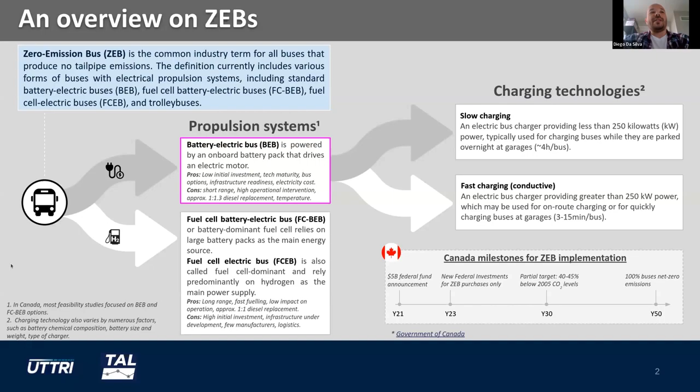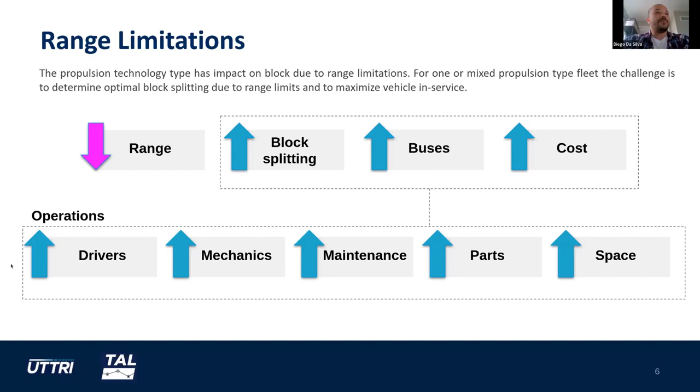Okay, another problem related to the operation is the transition phase, where diesel and electric buses, or ZEB buses, will coexist, making the problem of optimizing the mixed fleet an even more difficult problem given the number of variables and parameters that must be included. The transition problem mainly affects large agencies, and less accurate decisions in this phase will imply additional costs due to inefficient fleet use. So the path to zero emissions is not a straight line, as you can see, and we require careful planning at all levels.

Okay, and speaking of planning, the traditional framework that previously followed a linear flow with decisions that started at the strategic layer should be reviewed as well. We can assume that the strategic level is more or less already at a more advanced stage, as many agencies, at least the medium and small size, have already decided on battery charging infrastructure. However, even those who have already selected the operational model will have to adapt to the new decision-making flow.

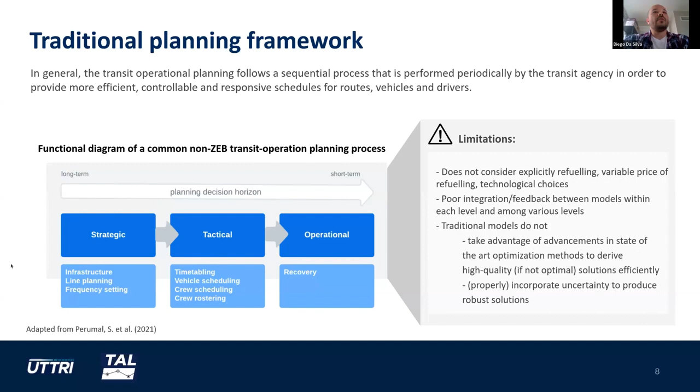So this is how we see the planning framework update. In this new context, the interdependence among decision layers will increase with emphasis on the tactical and operational levels, which, in addition to reviewing the flow of decisions, means we'll have to check the methods and processes whereby some traditional problems are currently solved.

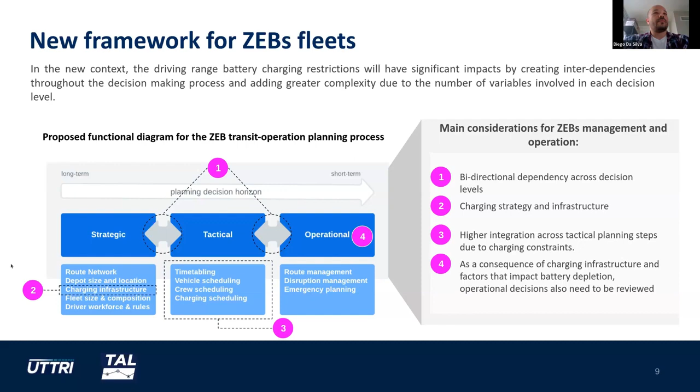According to the OPTA report published last year, the technology must be suitable for the network rather than the opposite. So in this strategic layer, decisions on which technology to use should be linked to emerging transit modalities and urban mobility philosophies. As previously mentioned, the transition phase, where the vehicle fleet will be hybrid, is one of the main points of attention in planning ZEBs. So the operational department should be equipped with tools for daily decisions about the mixed fleet.

In the tactical layer, the impact will be mainly on timetabling processes, vehicle scheduling, driver scheduling, maintenance staff scheduling. So all the scheduling stuff. In this layer, decisions are largely supported by IT tools. However, software development companies are still researching and collaborating with academia to update their products. Current solutions still need to be prepared to deal with each transit agency's decisions, new variables and new parameters, since the operating model is not standardized and will strongly depend on local features and local conditions.

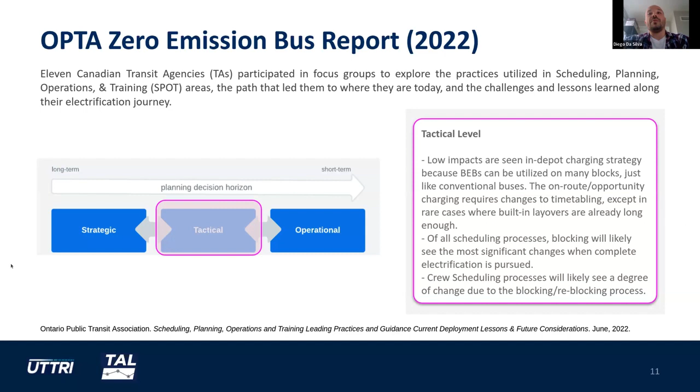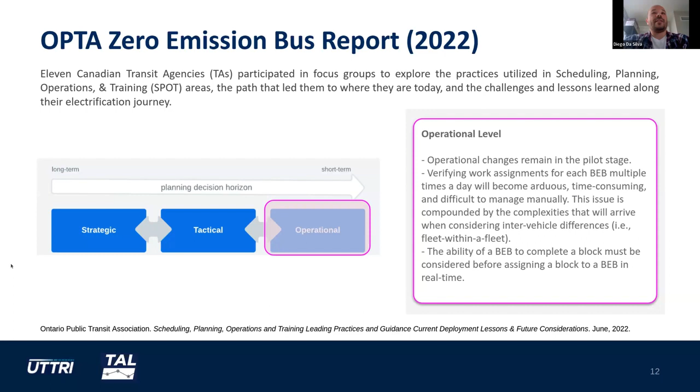The operational layer, where day-to-day decisions are taken, will be greatly affected by problems during the transition as well. As highlighted on this slide, verifying work assignments for each BEB multiple times daily will become arduous, time-consuming, and difficult to manage manually. Thus, decisions should be data-driven and rely heavily on automated tools. So indeed, the transition to ZEBs will require a strong IT strategy for developing new tools and being ready to deal with the massive use of data.

At all levels, especially in the tactical and operational layers, data-driven decisions will be crucial in optimizing the service. Here, we are not limiting the options to more sophisticated mathematical modeling, but also visualization tools, dashboards, performance indicators, and decision automation through learning methods. Despite not being the focus of this presentation, transit agencies are living a crucial moment to review their technology architectures and adjust their systems to an increasingly integrated and data-oriented business model.

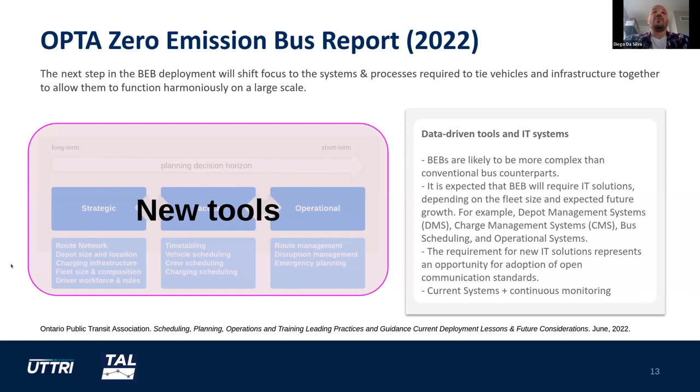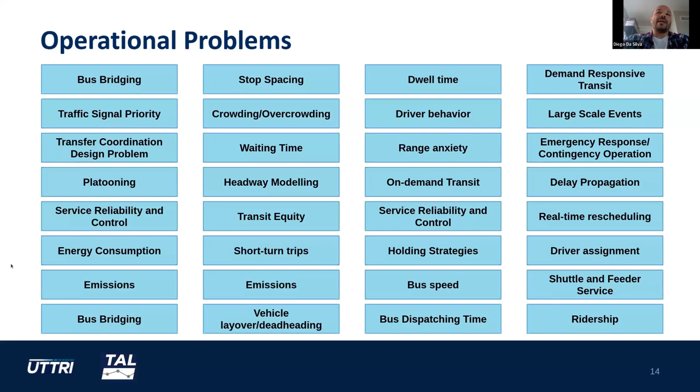We want to emphasize problems at the operational level to share our recommendations with transit agencies. Even the feasibility tests are relevant data so that we can anticipate the modeling of some operational problems. If we can access this data, it is quite helpful to update all this range of problems that we are showing on the slide. We list the main applied problems, some of which are known from day-to-day operations and will be impacted to a certain degree by strategic and tactical decisions. In this section, we will have a presentation of energy consumption analysis that can give us ways of thinking about solving problems using computational methods on energy consumption. Yeah.

Okay, so the future, or rather the present, of the challenge in implementing ZEBs lies in identifying the most relevant tactical and operational problems, using data in its most diverse representation, and adopting new optimization methods combined with learning methods. And collaboration is at the heart of all this, because just like the challenges in climate change, those problems can be solved in partnership. So I'm sure our team is eager to collaborate more closely with companies and transit agencies.

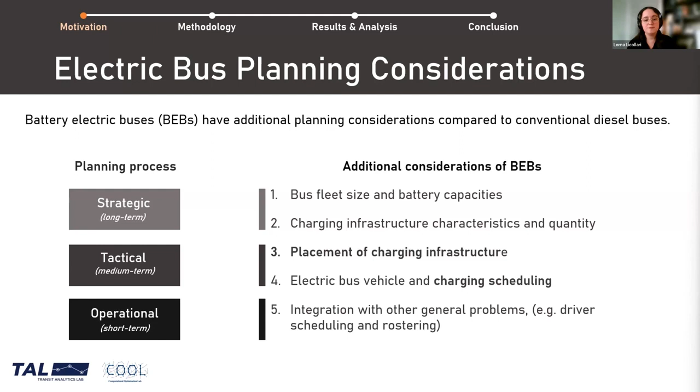So just a little bit of background within the context of battery electric buses. There tend to be 4 primary modes of charging. There's in-depot charging, which is essentially what it sounds like, where chargers are installed in the depots or in garages, typically charged overnight, and these chargers tend to be slow chargers, around 150 kilowatts.

And then we also have wireless and on-route charging, which to a certain extent are both chargers that operate along a bus's travel. Wireless chargers are typically installed along a road, and on-route chargers are non-wireless chargers that are installed at stops or at terminals. Both of these tend to be faster chargers, with wireless chargers typically ranging from 100 to 300 kilowatts, and on-route chargers can be up to 600 kilowatts.

Another novel approach is battery swapping, where battery electric buses with removable batteries are used. These batteries are fully charged and then swapped during daily operation.

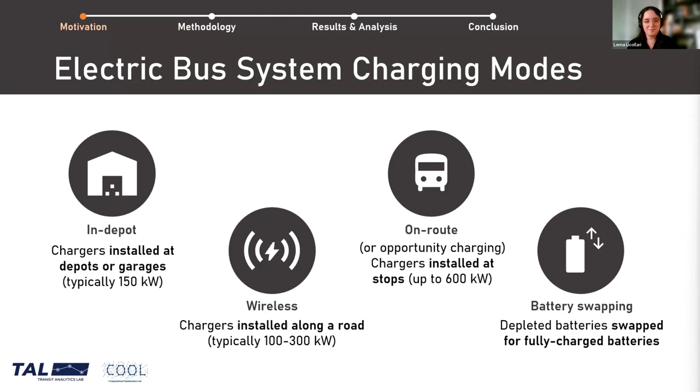So within the problem of optimizing battery electric bus charging infrastructure, there are a number of approaches, each taking a slightly different perspective with some combination of characteristics that relate to the context of the problem. Generally you'll see either an electric or a mixed bus fleet composition, where the problem focuses on a full replacement of a bus fleet versus an existing mixed fleet and the transition period.

There's also the different charger types and charging modes that we discussed previously: the charging speed, the mode, the capacity of the chargers, and the cost. There's also the decision scope, which reflects what the problem is trying to select, which parameters involved in the system are assumed or given, and which parameters are being optimized.

We also have the operational characteristics, which tends to be the charger location. Are we putting chargers in the depots only? Are we putting chargers along terminals? Or are we also considering the possibility of intermediate stops with chargers installed?

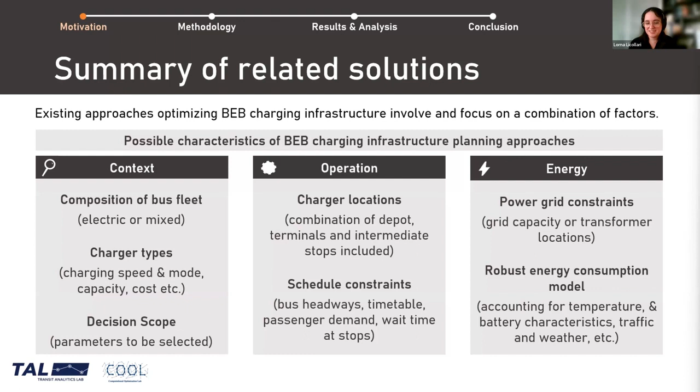And within the context of this problem, there are a few areas that we are focused on developing, particularly in the context realm, the decision scope. So we are interested in the scheduling of vehicles with explicit consideration for the charging schedules, where we kind of try to tackle both problems at the same time.

We're also interested in placing chargers not only at depots and terminals, but also at intermediate stops. And in terms of schedule constraints, when you rely on, say, a timetable or bus headways, many solutions tend to make assumptions about the underlying block schedules and vehicle schedules, which are important when planning out the charging of these vehicles.

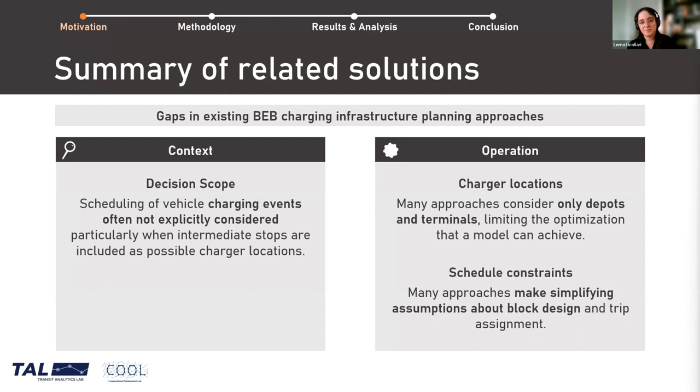So in terms of the research objectives, it's kind of two primary areas. We have the design of a generic solution for optimizing the on-route charging infrastructure. And we have a numerical analysis with a simplified model structure and applying that to data from a Canadian transit system. The generic model is designed to kind of support potential more robust representations of a number of characteristics, including charger characteristics, energy consumption models, and more complex electricity cost and infrastructure systems.

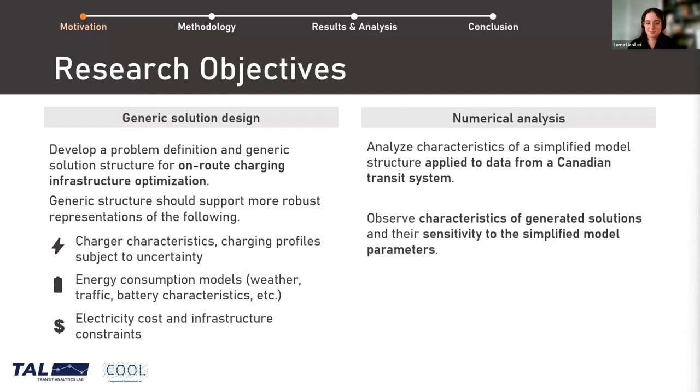In terms of framing the problem, as I mentioned previously, the focus is to maintain an existing block schedule with a fleet of battery electric buses by placing the chargers and scheduling the vehicle charging. This fleet will be entirely electric. All bus stops, including terminals, are options as potential charger locations, and we assume that there will be chargers at depots so that at the start of daily operation, all vehicles can be fully charged.

The transit network in our problem will consist of multiple bus routes that are being served by the bus fleet. And the constraint for vehicle charging is that we must maintain vehicle block schedules, so we're not adding any additional wait time.

You might notice that in this framing, we are considering a single block schedule, when the reality is our charging infrastructure will support a system through multiple different sign up periods with a block schedule associated. So one of the next steps that we'll discuss later in the presentation would be to kind of consolidate the different solutions for different candidate block schedules. And this could be solved as a set covering problem.

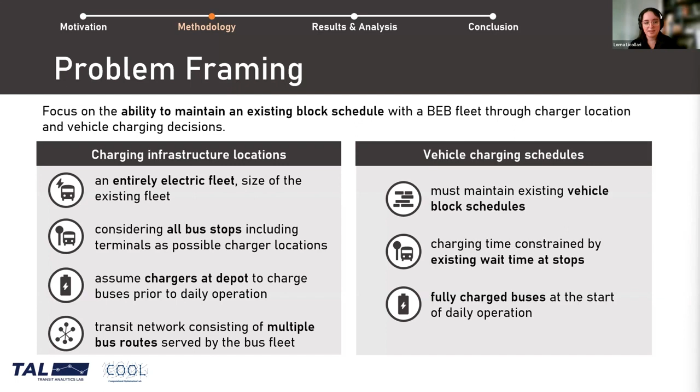So in terms of the problem structure, we have a network of potential charger locations, which in essence is stops and terminals. Each route in our system spans a set of possible charger locations. We set up our block schedules as a set of blocks where each block represents a vehicle's activity over the study period, which is one transit operation day. And each block consists of a set of trips where in each trip, the vehicle operates along a route.

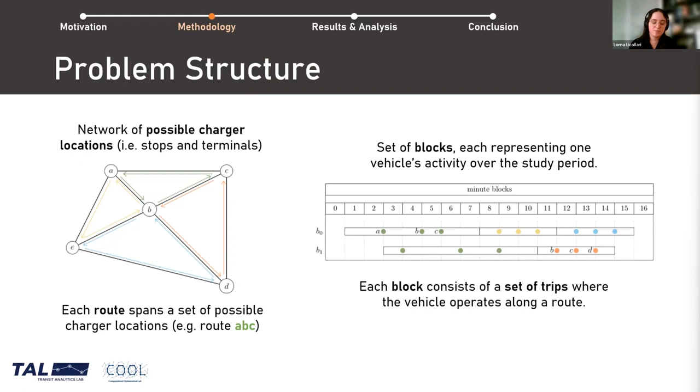In terms of constraints, we have three different categories of constraint sets. We have constraints surrounding the state of charge of a vehicle, which constrains the charging and discharging of a particular vehicle. We have constraints to maintain the physical capacity of a charger, i.e. we have one charger at a bus stop, we can't have two buses charging at the same time. And we also want to constrain when a vehicle can and cannot charge, which is essentially the vehicle can only be charging when it's idling at a stop that has a charger.

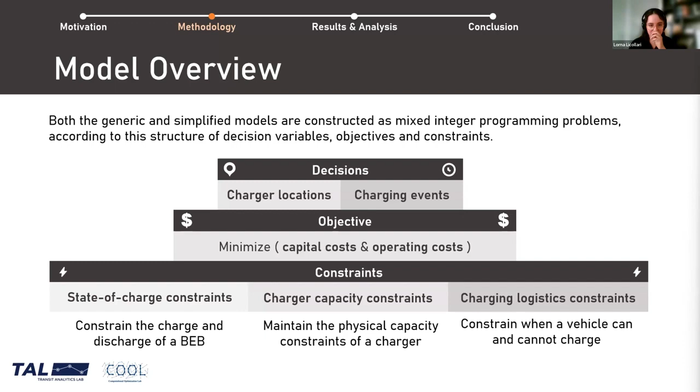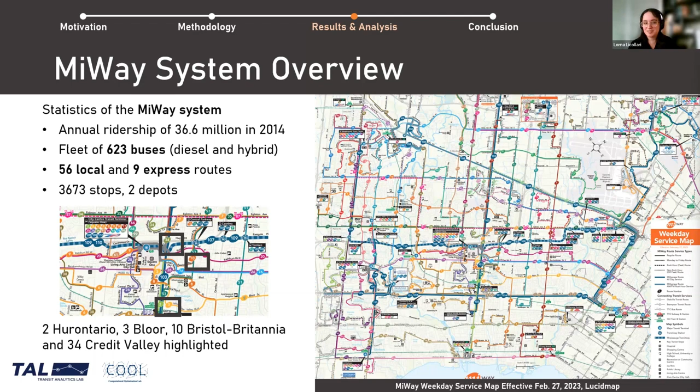In terms of the numerical analysis that we did during this project, we relied on data from the MiWay system. So I just have a quick overview of the MiWay transit system here. You can see the annual ridership of 36.6 million. There's a fleet of 623 buses, which currently are a mixed fleet of diesel and hybrid. We have 56 local and 9 express routes. You have over 3,000 stops, and there are 2 depots. I also, in the image here, have 4 routes highlighted. The reason for this is because these are the routes we focused on in our base numerical solution.

Here you can see on the side, we have a depiction of the final solution with the chargers placed. You can see the 4 routes in the different colors with labels, and we have 7 chargers placed along these 4 routes. You can see that we have some overlap. So even though each route ranges from 4 to 2 chargers, because of the overlaps, we only have 7 chargers in total.

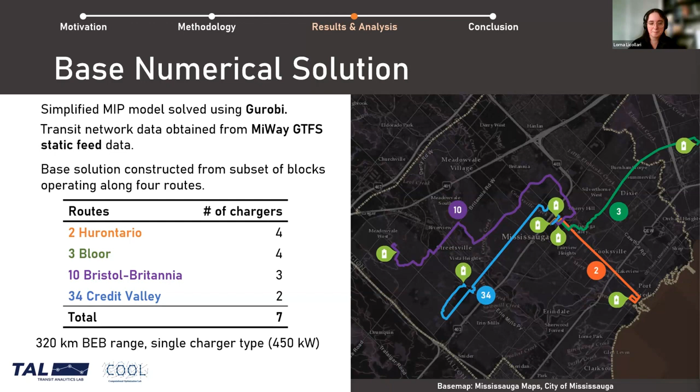The model was solved using Gurobi. And as I mentioned before, MiWay data was used, specifically GTFS data from the static feed. And then the second half of the integrated problem involves the charging schedules. Obviously, the charging schedules operate on a per block basis, so it would be difficult to show it all on one table here. But on the side, you can see the image.

We have a partial sample schedule for a bus which operates on the 3 Bloor route. You can see that it starts its journey at the City Centre terminal. It completes one trip to the Kipling terminal and then charges for 3 minutes, after which it goes all the way back to City Centre terminal and back to Kipling again to charge for 3 minutes. And then on its next set of trips, it decides to charge at this intermediate stop here for 1 minute before proceeding on its journey.

And then another useful set of data to look at here is the total time charged at each of the chargers. You can see the 7 chargers listed here, and it's pretty clear that the terminals are where the buses tend to charge for the longest, which makes sense because that is also where they're idling for the longest. And you can see that for some chargers, like this Winston Churchill Boulevard charger, we don't need it very much, but we need it as kind of a pickup during the operation.

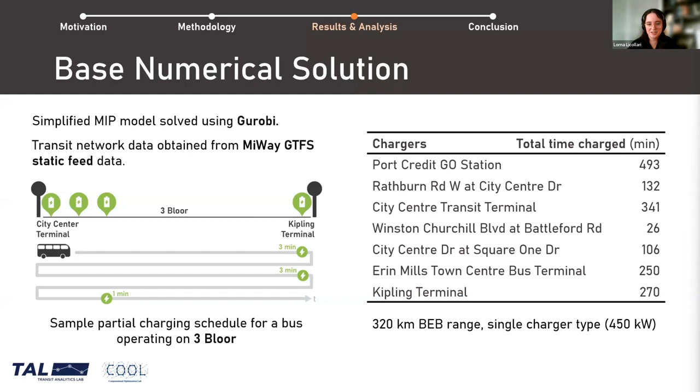So in terms of general analysis ideas we can take from this, it's pretty clear that charger placement is favored for certain types of stops. Of course, stops and terminals where vehicles idle for a longer period of time are much more likely to have chargers there, which makes sense because putting a charger at these stops can give us higher charging gains when we are planning the charging schedules. It's also clear that because we have a greater number of buses passing through stops where multiple routes intersect, it's also more cost effective to install chargers at those locations as well.

It can be observed that often chargers are placed at route terminals, but this is not always a straightforward rule, especially with more complicated transit networks with more route intersections. There still is some benefit that could be gained from considering intermediate stops as potential charger locations.

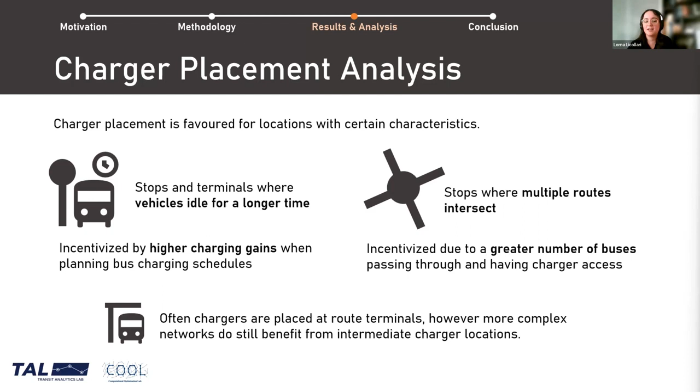And then another important element of analysis is looking at the sensitivity of the model, because obviously this is a simplified model that we're looking at for this project. So there are potential areas where real world data could significantly impact the results. And we can see that when we vary the state of charge lower bound, which is essentially the lowest that our state of charge for a bus is allowed to reach. It cannot go below that value. As we increase this number, the number of chargers that we have to install, of course, increases.

This is kind of a reflection of different battery electric bus charging strategies. For example, one charging strategy could be don't charge the bus until the battery is almost depleted or quite low, and then you charge for a longer period of time. Or the alternative is you have more frequent charging, even when your bus isn't necessarily at a very low point. You just keep the level of charge higher.

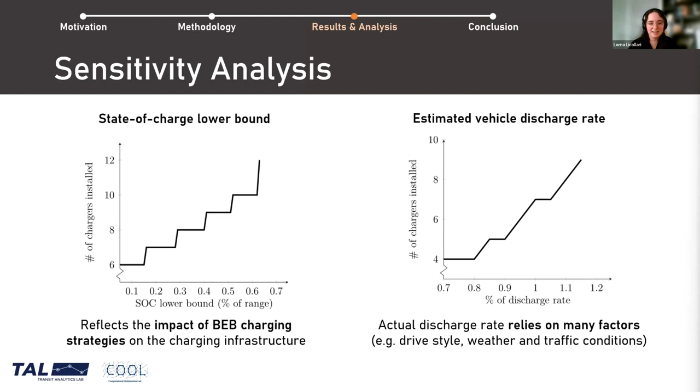The other important parameter to look at is the vehicle discharge rate. For this research, we used an estimate that was very simplified and a linear discharge rate. But obviously the energy consumption of the bus relies on a number of factors. And so it's also useful to see that as the discharge rate increases, of course, the number of chargers installed is also increased.

In terms of contributions, as I mentioned before, this work created a generic model which considers both terminals and intermediate stops, and explicitly decides the vehicle charging schedules for each of the blocks. And the focus is on supporting existing block schedules instead of trying to add buses or add wait time to schedules, and just see what kind of charging infrastructure we can build based on that.

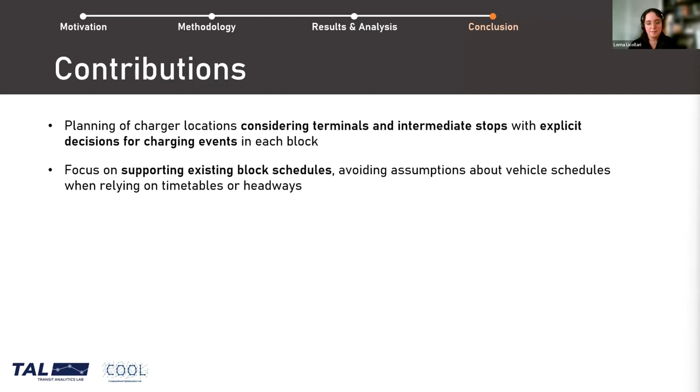Of course, there are many possible directions to extend this, and many next steps. A few are listed here. One of the first extensions that should probably be made is to develop a system, again, potentially using set covering, to consolidate the different charging infrastructure solutions for multiple candidate block schedules. It's definitely not true in a practical circumstance that we can only have one block schedule. And so it's important to make sure that the charging infrastructure can cover many different candidate block structures. And alongside this, it's important to investigate the impact of overfitting to a particular block schedule.

It would also be useful to conduct a numerical analysis with more robust energy consumption models, charging models, and cost models, and also a full system analysis of the MiWay network, just to see what kind of charging infrastructure could be required based on the existing schedules and fleet.

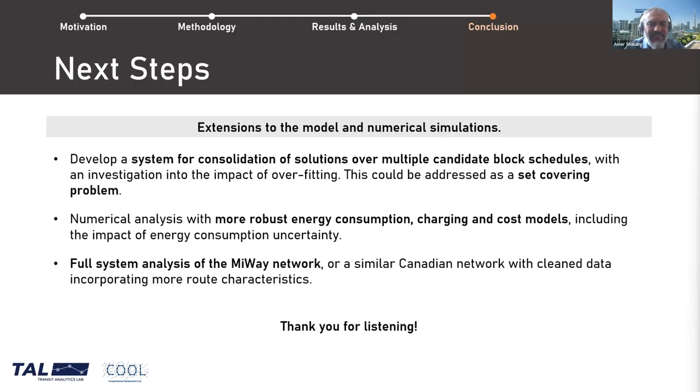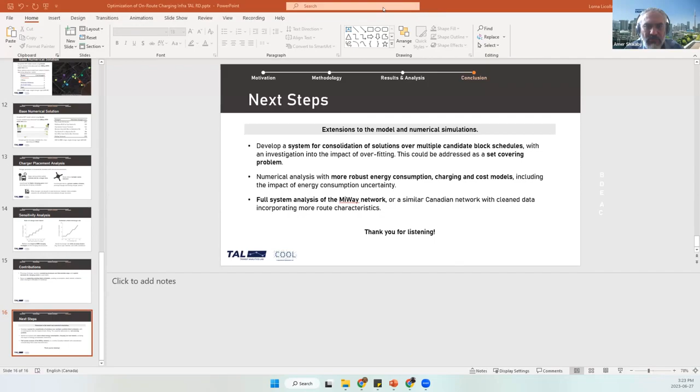Thank you so much, Lorna. Indeed, a lot of work really went into this. It's a very complicated problem, so it was a very interesting study to actually try to combine both the optimal decisions on the charging infrastructure with the charging scheduling as well.

So congratulations for doing so.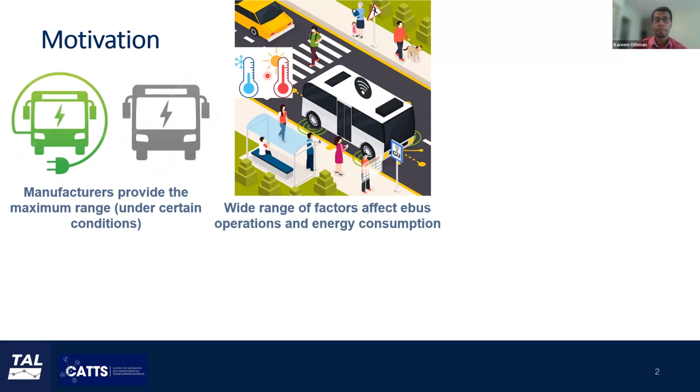So what we really need here is a prediction model that helps us in the appropriate planning, and helps us to really know when this bus will need to be recharged. So what we are trying to build here is some sort of a model that really facilitates the planning or scheduling of our electric buses.

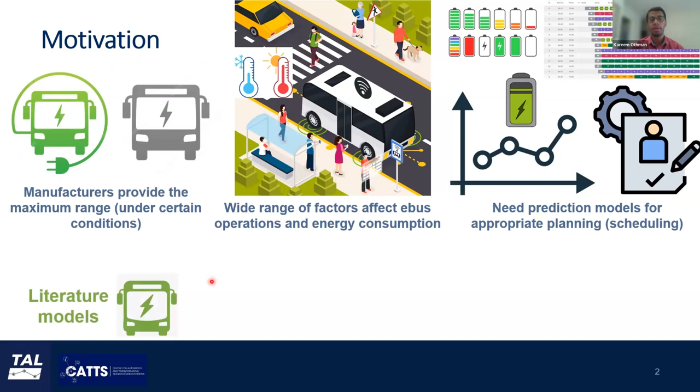So in the literature, we have two types of models. The first one is based on simulation studies, and usually simulation studies are used just to understand the relation between some inputs and the energy consumption, and they are not really prepared for prediction. And the second type is real-world studies based on real-world data, and usually this is the one that's really used for predicting the energy consumption. And our study is really one of the real-world studies.

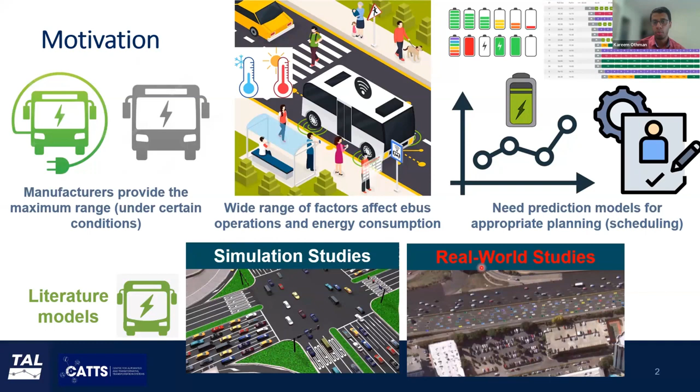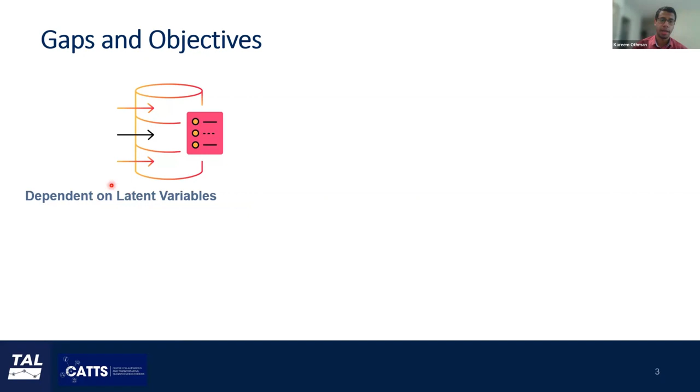So what are the gaps? When we really look at previous models, they are mostly dependent on some latent variables. What I mean by latent variables is that they built the prediction models based on, for example, the driver behavior or based on the actual stopping events.

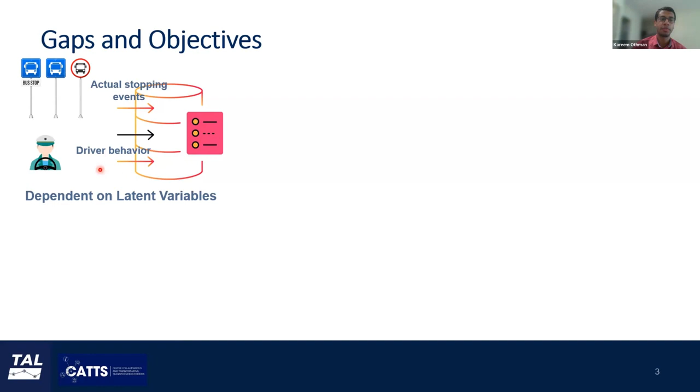But if you are doing planning for electric buses or building your schedules, you have no idea about the driver behavior. So this information is not really provided in the planning stage or in the scheduling stage. You have no idea about who is driving the bus, what's the behavior of this driver. You have no idea about the actual stopping events.

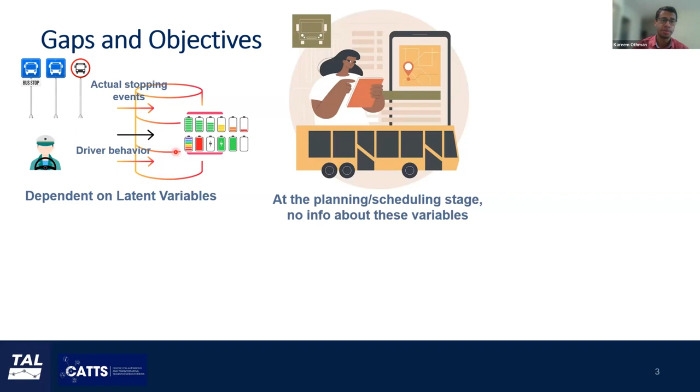So what really happens here is that we are trying to rely on data that are really available at the planning stage. For example, instead of using the actual stopping events, we are using the potential stops. We know that the bus will be stopping at the bus stops, and it might stop at the intersection. So we are including the potential stops, for example, the number of bus stops and the number of intersections in our route.

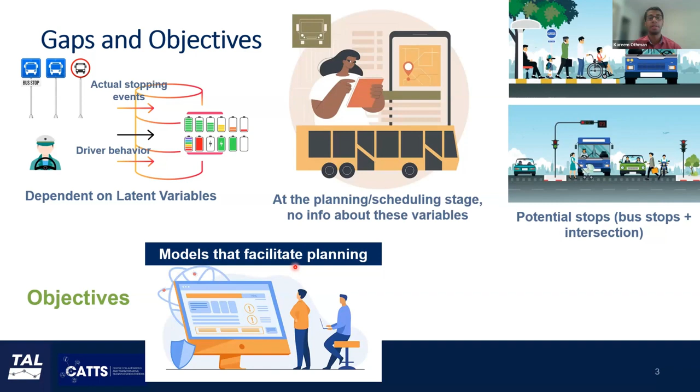So our objective here is to build a model that facilitates the planning and building of our transit scheduling. And actually, when you look at the literature, you will find a large number of prediction models that have been built all over the world, but none of these models were really developed here in Canada. So we will be building our first electric bus consumption model here in Canada, and it's going to be based on the TTC electric buses.

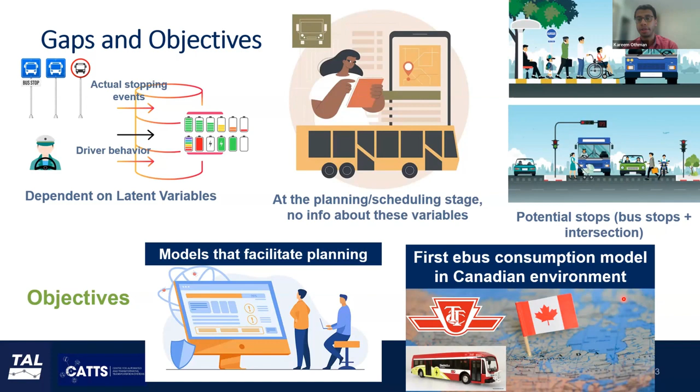Let's explore the TTC fleet and the dataset we have used. So the TTC is operating 60 electric buses. 10 of these buses are manufactured by BYD, 25 New Flyer, 25 Proterra, and this makes the TTC the transit agency that operates the largest electric bus fleet in North America.

And these buses have been operating since 2019 as a part of the TTC Green Bus program that targets 2037 for full transition to a fully electric bus fleet. And actually, the city is planning to move to zero emissions by 2040. So we are moving rapidly to fully electric buses and a fully zero emission city. So this actually emphasizes the need for prediction models and really to have proper planning and scheduling for electric buses.

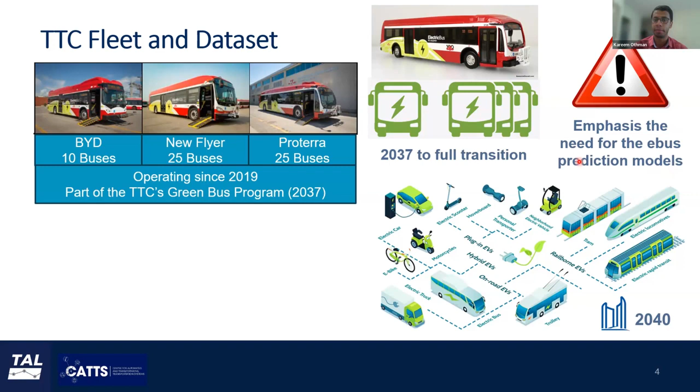So what's really the main advantage of what the TTC is doing is that the TTC is testing these three types of buses simultaneously on the same route, which allows you really to compare the performance of every bus under the exact same condition. So in our prediction model, we'll use the average energy consumption rates for the 3 years, 2019, 2020, 2021, to build our prediction model.

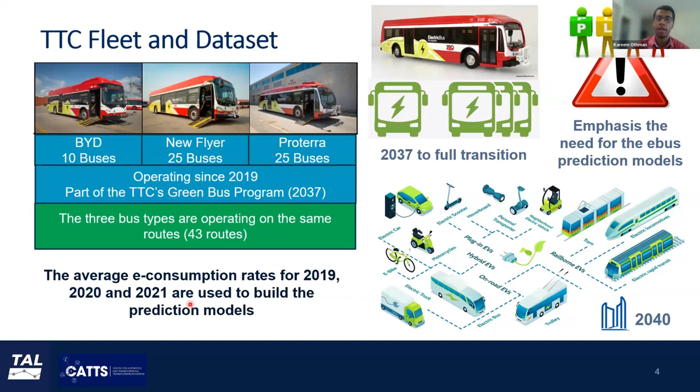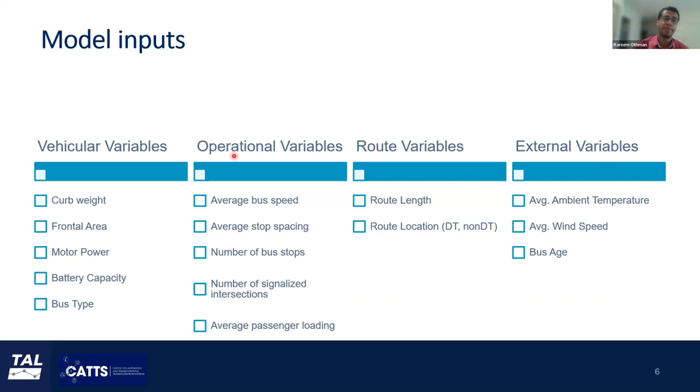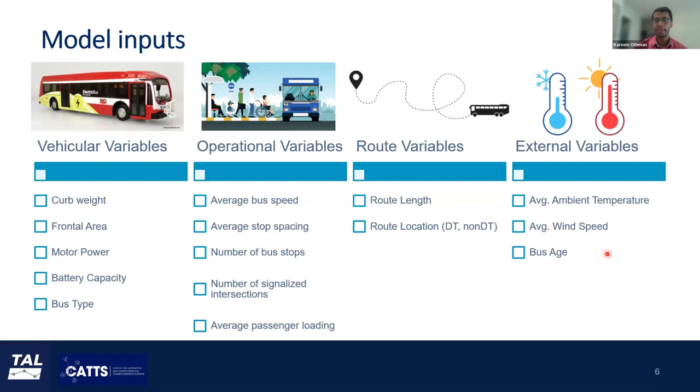All right. So for the modeling inputs, we have 4 types of parameters. We have vehicular parameters such as the curb weight, the frontal area, the motor power, the battery capacity, and the bus type. For the operational variables, we have the average bus speed, the average stop spacing, the number of bus stops, the number of signalized intersections, the average passenger loading. For the route characteristics, we have the route length and the route location, downtown or non-downtown. And we have external variables such as the average temperature, the average wind speed, and the bus age. None of these parameters are latent variables. All these parameters should be available and known at the planning stage.

All right, so let's talk about the methodology. In our work here, we will be testing 26 different models belonging to different families, for example, the linear family and the decision tree family, and we have 2 stages of analysis. The first stage is to develop one prediction model for the 3 types of buses. Here the workflow starts by testing the 26 models. We are not optimizing the models, we are just testing them. Then identify the family that achieves the best performance, then the method within this family that achieves the best performance, then optimize the hyperparameters.

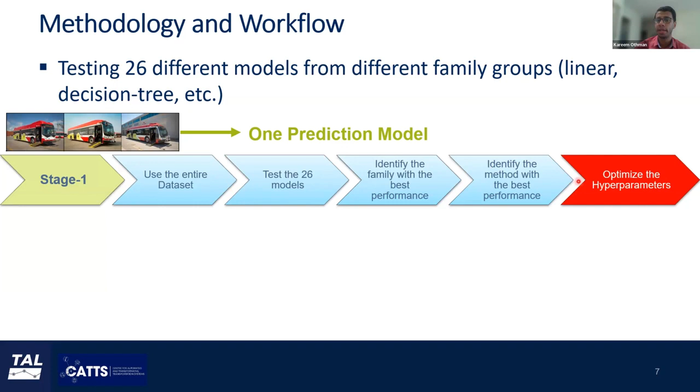And in stage 2, as we have different performance by bus type, we are developing 3 different models, one model for every bus type. In this stage, instead of testing the 26 models once again for every bus, we start from the family identified in the first stage, and we test this family to find the method that achieves the best performance, and then optimize its hyperparameters.

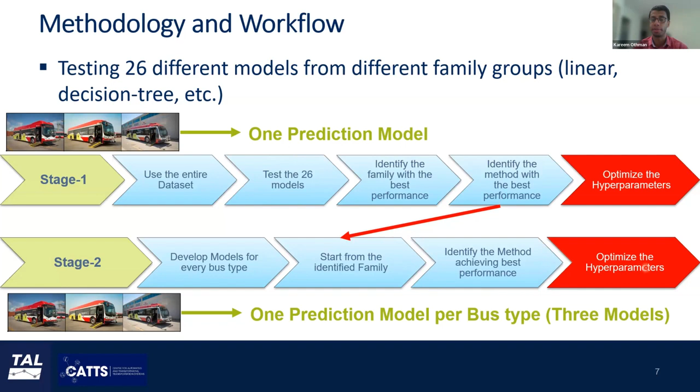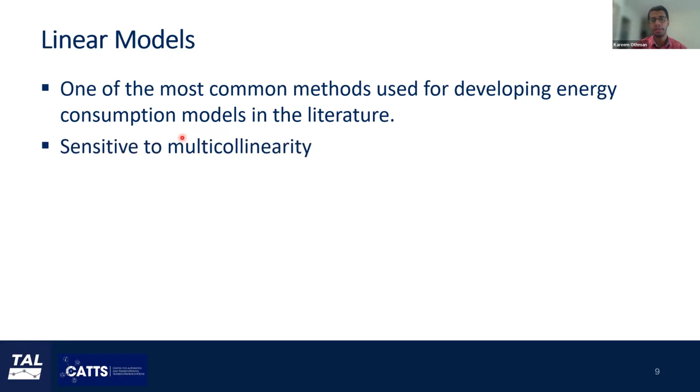Let's start with stage 1. As I mentioned, stage 1 focuses on developing just one prediction model for the entire data set. I wanted to start with the linear models, because they are one of the most common methods used in the literature for developing consumption models. But one of the main issues with these models is that they are sensitive to multicollinearity. And in the literature, you'll find a large number of studies that ignore multicollinearity. When we look at the correlation matrix for our data set, we find high multicollinearity between some of the inputs.

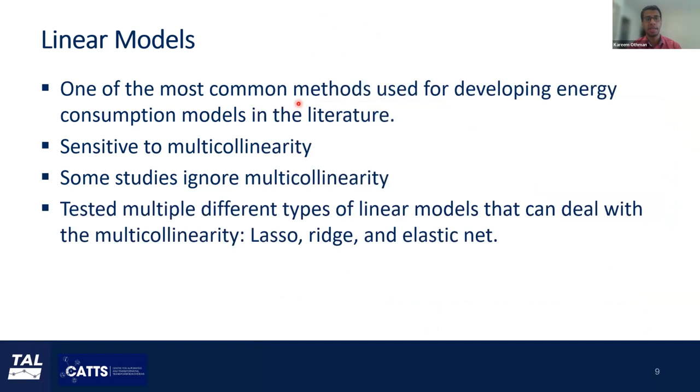So we really need to deal appropriately with multicollinearity in our data set. So instead of just using the traditional linear regression models, we will be using the lasso and ridge regression. And these models really focus on penalizing the model for adding any additional parameters. So we are trying to select the minimum inputs that really achieve the best performance. If you are using machine learning, the lasso regression is the L1 regularization term, and the ridge regression is the L2 regularization.

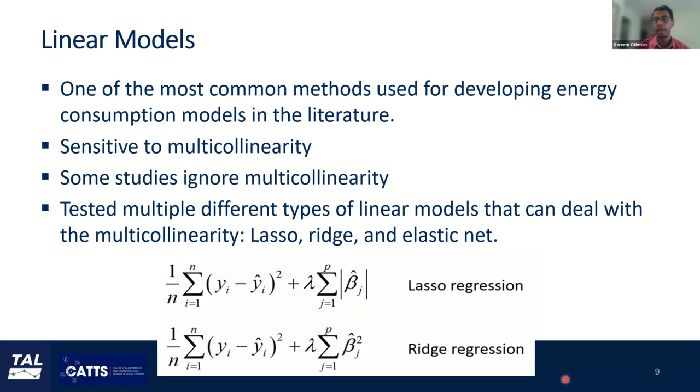And let's get back to the 26 models we have tested. So we have tested 26 models, and finally, the best models that achieve the highest level of performance are CatBoost, XGBoost, random forest, and LightGBM, and they are achieving an R-square between 0.55 to 0.61. And just to highlight that these results are not with optimized hyperparameters. So we still need to optimize the hyperparameters and really test our methods here.

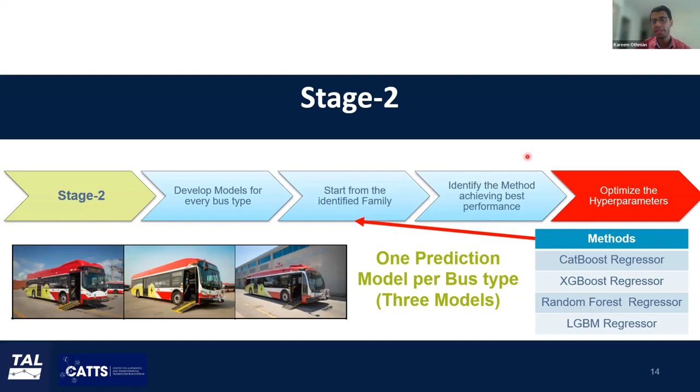All right. So when we tested these 4 methods for the 3 types of buses, we will see that the best method to achieve the highest R square value, or the best performance, really depends on the bus type. For example, CatBoost is the best for BYD. For New Flyer, for example, XGBoost is the best.

But I just wanted to highlight one thing when it gets to the R square value and mean square error. You will see that for BYD and Proterra, you have a good to moderate R square value with low mean square error. But when you look at New Flyer, you will see that the mean square error is very low, and you have an R square value of 0.24, which is, again, a very low R square value. And let's dig deeper in the New Flyer data set and really understand why this performance is happening.

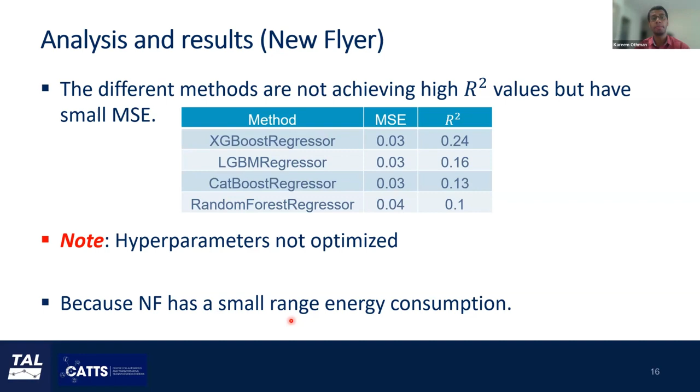When we look at the New Flyer data set and the prediction models for the New Flyer, those are our 4 methods. We will see that the mean square error for these 4 methods is around 0.03 to 0.04, and you have a very low R square value. And the main reason for that is that the New Flyer data set had a very small range for the energy consumption. Let me go back quickly to one of the previous slides.

All right. So lastly, we have compared our model with previous models in the literature, and one of the main issues in previous models is that they cannot really differentiate between different bus types. They just have one model that doesn't really take into consideration the different parameters for the different bus types. So they are producing the same energy consumption for the different bus types.

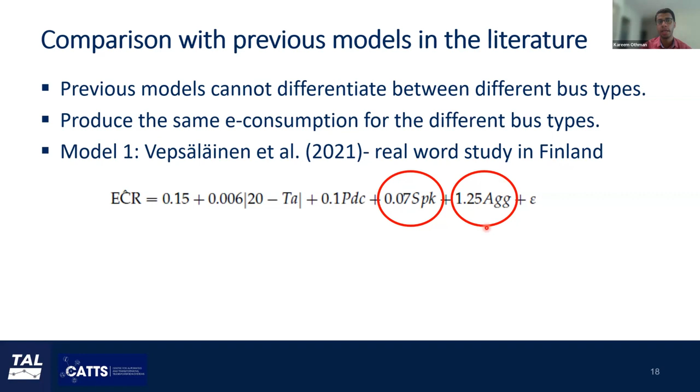Let's start with one of the models that was developed in Finland. When we look at the model, it doesn't really take into consideration any of the bus parameters. It really focuses on the Ta, which is temperature, the stop density, and the driver aggressiveness. And again, it relies heavily on some latent variables. If you are doing some planning, you have no idea about the bus, the driver aggressiveness, or the stop density.

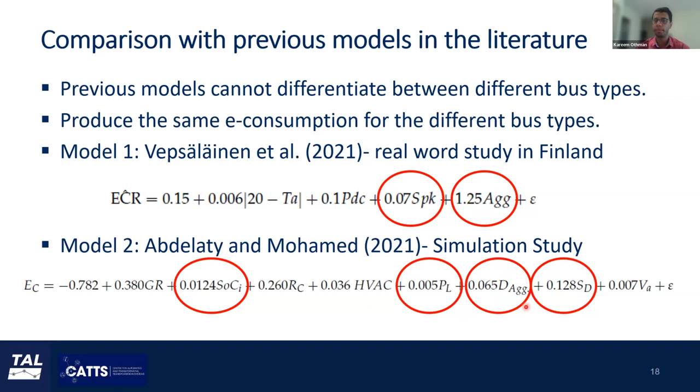And there was a second model that's mainly based on a simulation model by Abdelaty and Mohamed. And again, it doesn't really take into consideration the different bus types, so it will produce the same energy consumption across the different bus types. And again, it's heavily based on some latent variables that you have no idea about in the planning stage.

All right, let's jump to the conclusions. The previous discussion has really shown that the energy consumption varies significantly across the different bus types, and this is happening across the different seasons. For example, BYD was the best in the fall and summer, but New Flyer was the best in the winter. And New Flyer had the most consistent energy consumption rate: 50% of the energy consumption was between 1.2 to 1.4 kilowatt hours per kilometer.

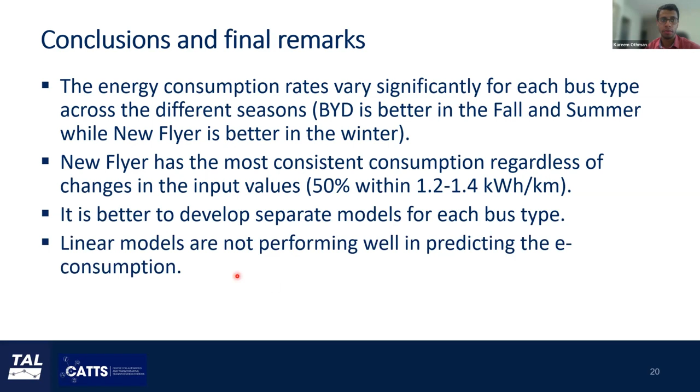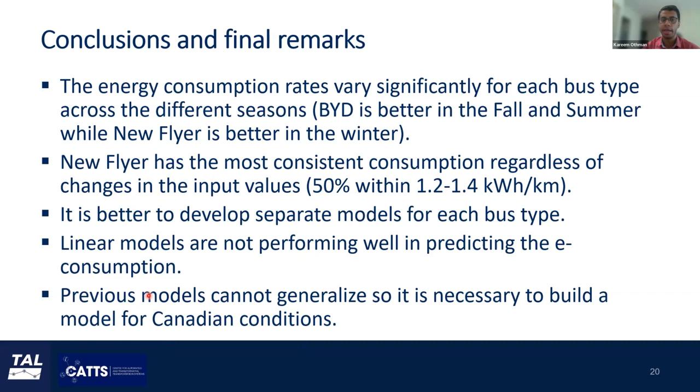As the performance is changing significantly from one bus type to the other, it's highly recommended to have separate models for every bus type. And again, we have seen that linear models are not really performing well in predicting the energy consumption rate, and previous models in the literature cannot really generalize. So it's really necessary to build our own simulation or prediction model here in the Canadian environment. And that concludes my presentation.